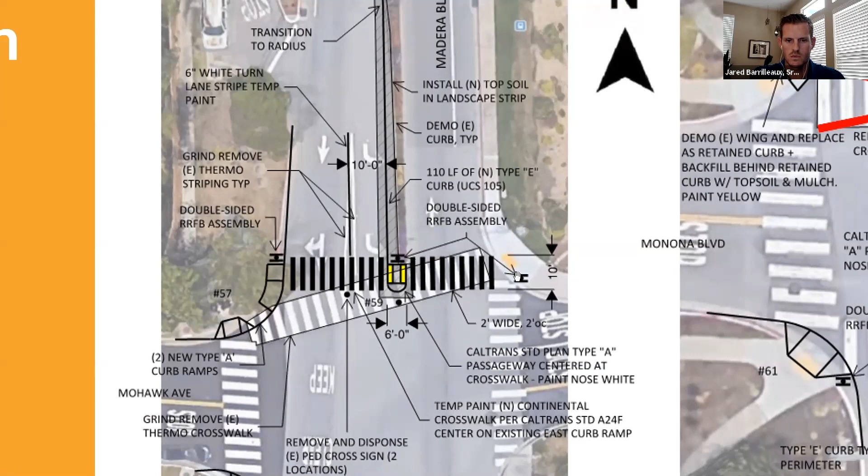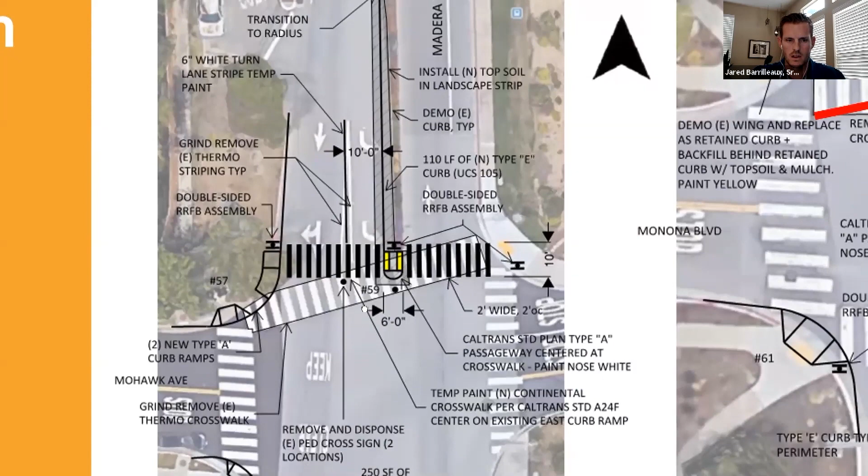Yes, I can do that, and your cursor should be able to guide people as well. So right here, this crosswalk - we recreated a more aligned curb ramp right here. We pulled the face of curb out a little bit to slow that right-hand movement of a vehicle around this corner, and also make a pedestrian a little bit more visible. We added rapid flashing beacons here across this crosswalk as well, so much safer ped crossing environment, and the alignment should really help out with that. Then on the south, this is the end crossing nearest the gas station on the corner of Tamalpais.

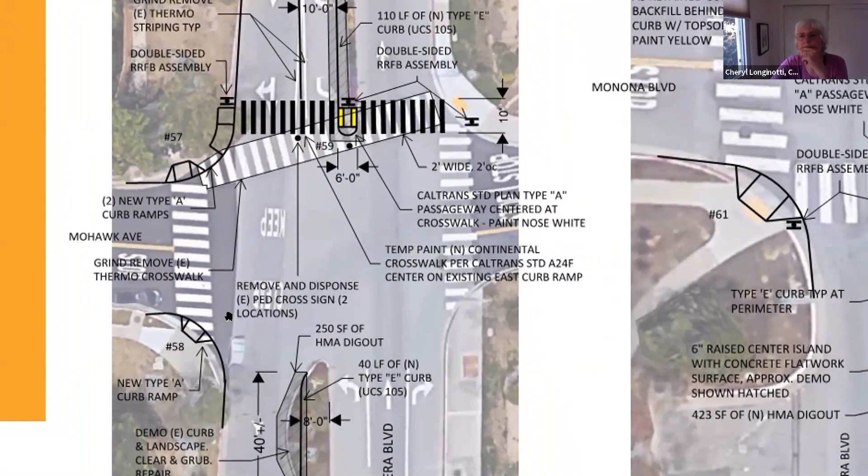And then on the south end of that intersection, we did a similar kind of treatment on this corner with a little bit more of a sharper corner to slow the car turning, and also bring the pedestrian out for visibility, reducing the crossing distance here.

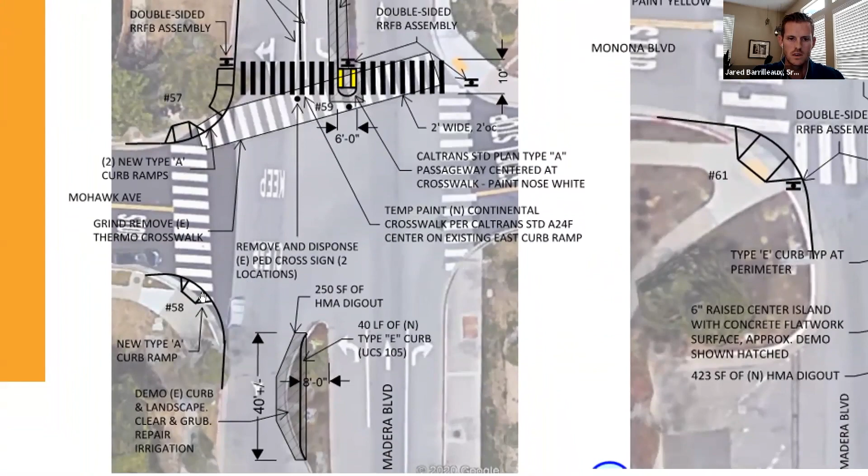Also part of this enhancement was that originally this median at the south side of this intersection bulged out quite a bit, and it created a pretty narrow passage for vehicles.

What's not shown here are the several options for a vehicle going southbound approaching Tamalpais. What was happening was if 3 or 4 extra cars piled up in the through lane, someone coming southbound on Madera wanting to make a right in this wide open turn pocket couldn't do so, because there's not enough width, and it just clogged it up.

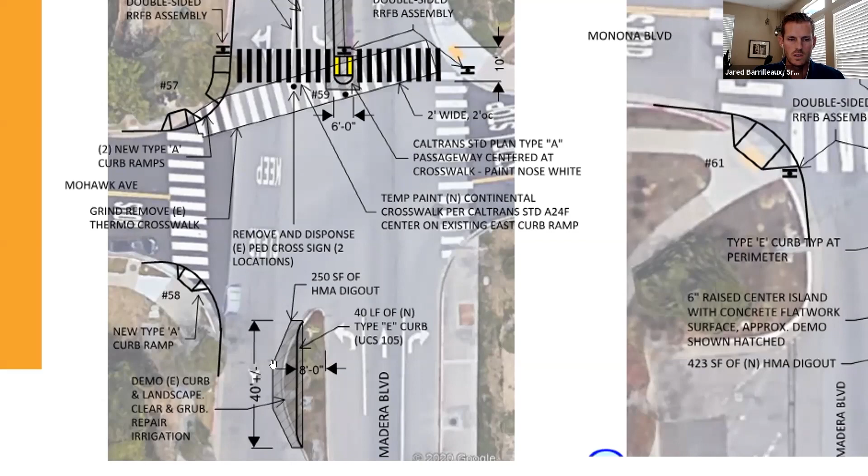So now this slight narrowing of the median has allowed this to fit a couple cars coming through, and it also doesn't neck down for cyclists coming through - it gives them a little bit more room. So that's a brief touch on some of the improvements here at this Mohawk intersection.

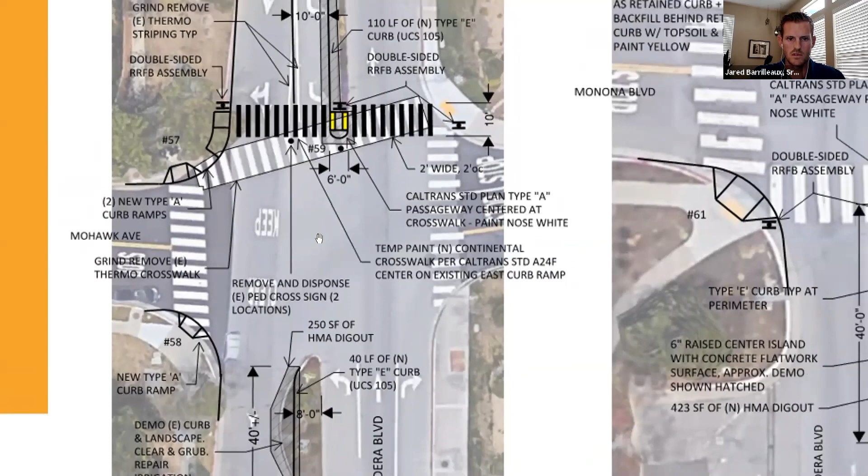Before I jump on, RJ, was there any other items you wanted to touch on for that intersection?

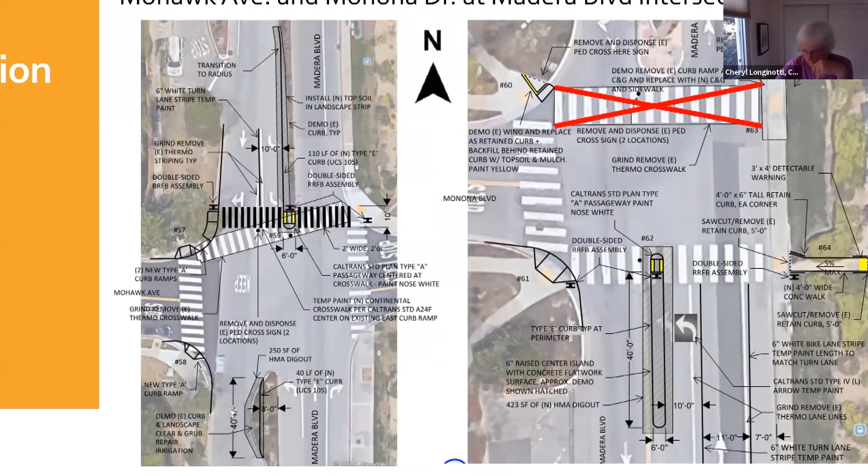Just a procedural note, and I'd defer to Bob ultimately, but I'd suggest we go through any comments from the committee and clarifications, then go through all of the items - I think we have about 6 items - and then open it up to the public at the end, and if we need to backtrack on slides, we can do that then.

I think I'm okay with that. First off, can we just stop and see if there's any questions from the committee members on this particular item? Is that okay, RJ? Yes, that's exactly what I was suggesting - we go through the committee, then after the 6 sub-items we can open up to the public, and if we need to revisit these, we can.

Okay, so are there any BPAC member questions? No comments, just questions on this item so far.

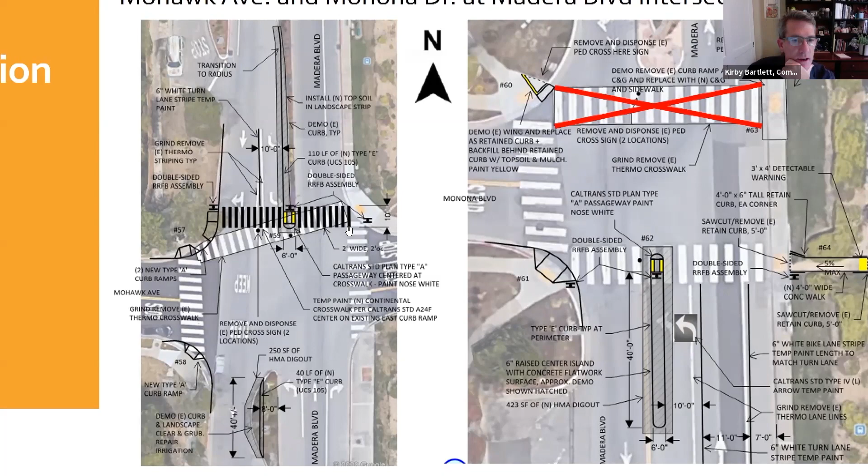This is Kirby, I have a question. Go ahead. The intersection or the crosswalk where you expanded the area to 6 feet, it looks like - is there still going to be a left-hand turn lane, or it looks like the grind removed the original striping - is that going to remove a left-hand turn lane? Is that correct?

No, the left-hand turn lane will remain. Right now it has a little split between the through-right and the left, so that split will be removed - it's just a single stripe. It still remains a 10-foot wide left-hand turn lane. Yeah, there was excess width that we were able to capture.

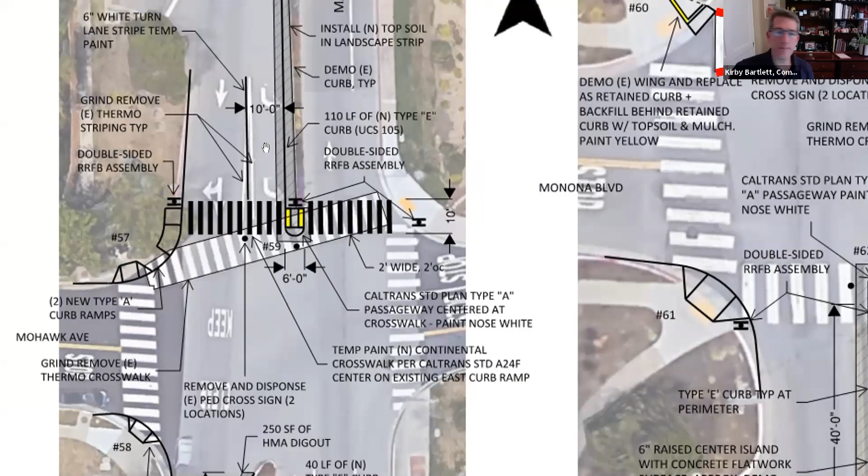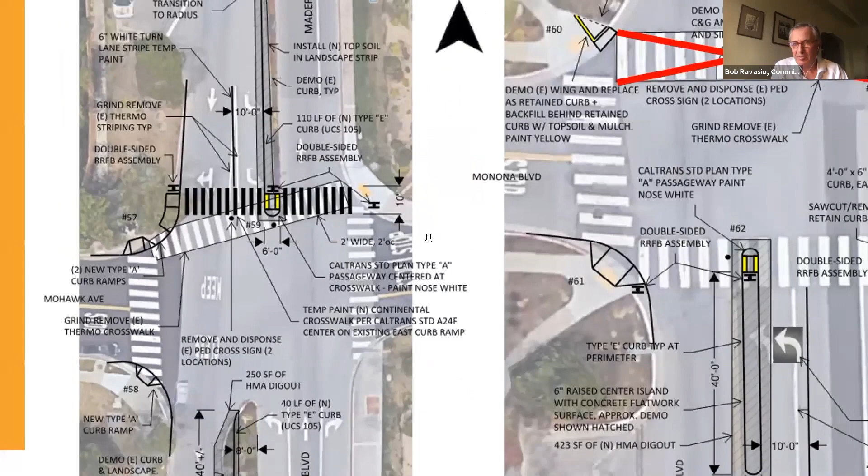Okay, thank you. Any other questions from committee members? Okay, thank you. Then RJ and Jared, I guess you can move on to the next one. All right.

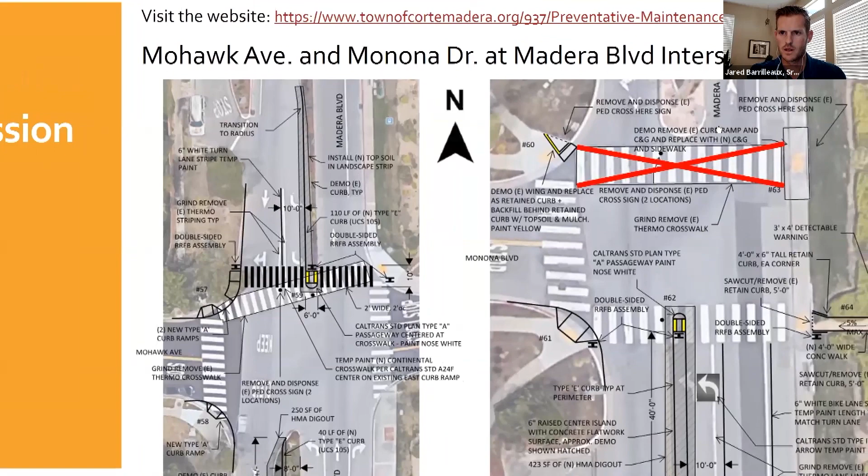So the next intersection is north from the previous one, up at Monona. Here you can see this originally had 2 east-west crossings across the road and 1 north-south crossing across Monona. There's a dirt passage here to the Safeway parking lot originally - so that was the original crossing environment.

What we've done is eliminate the northern crossing, which was not well aligned with how pedestrians wanted to make their way to the shopping center. The natural pathway was here, and we thought the redundancy in crosswalks was unnecessary. The southern crossing we felt was actually safer and provided better sight distance. So based on that, we eliminated the northern one and improved the southern one.

Some of the improvements include the Ped Refuge Island here, the RRFBs here, and the bulb-out corner type A curb ramp, reducing the crossing distance.

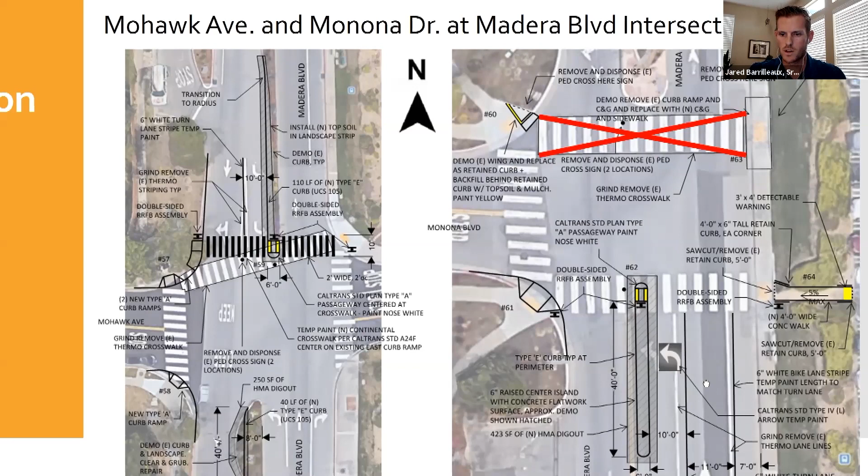In a similar fashion as over by Mohawk, the striping was slightly modified to allow for the median here, but there's still a left-hand turn lane and a through lane. Of note is the 7-foot bike lane, which will have a 2-foot buffer for a Class 2 northbound bike lane after our next microsurfacing project is implemented.

As of now, the result of this project is more of a temporary condition, in which the striping presented here will be applied. This portion of Madera is listed on the town's bike master plan as a Class 2, and there was enough width for us to do buffered Class 2s, so we thought that was a benefit.

But it's not installed yet, so we'd welcome any comments if there's any downside you can think of. We thought it was a benefit, so that's what we've proposed in our construction documents, and we would plan to do that if you all are in agreement.

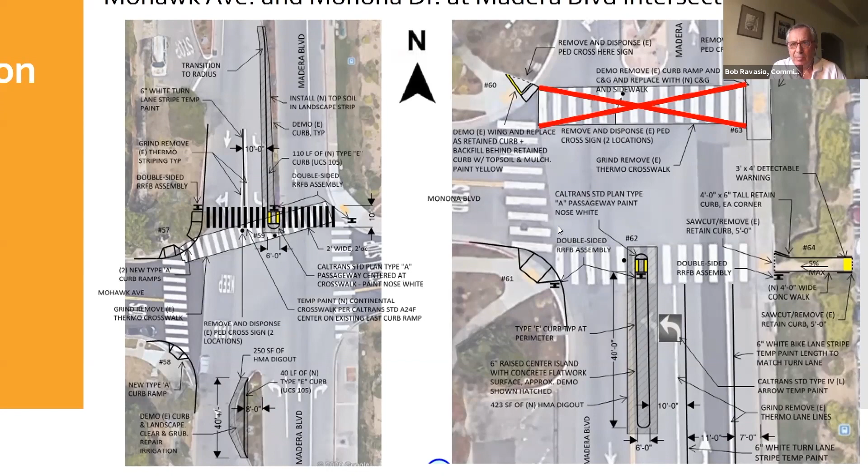I'd like to talk about that one a little bit, just to understand it better. Sure.

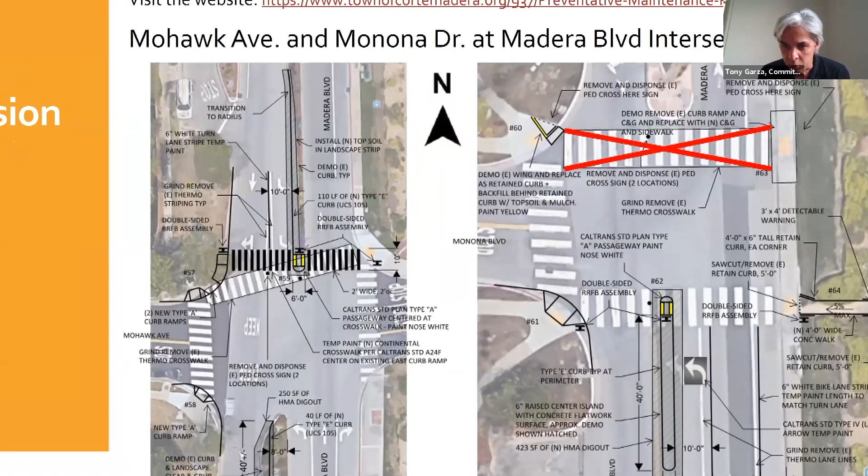So it looks like right where your cursor is, pedestrians would be encouraged to take that path toward the supermarket. You create a situation where you don't have a ramp at less than 5%, or it's 5%, but then you get dumped right into the parking lot. Is there going to be a path of travel that extends all the way to the front of the store? Yeah, I forgot to mention that little dirt path is getting grading and concrete work to make it an actual concrete pathway connecting to the parking lot.

At the parking lot, those stalls are going to be restriped. The first four stalls, where the pathway intersects between two parking stalls, that intersection will be widened for a 4-foot hatched zone. The two adjacent stalls on each side will be made compact and narrowed a little bit, so there will be no loss in parking count for the shopping center. That pathway will connect to an accessible, hatched, no-parking spot.

This comment came up, I don't recall if it was at BPAC or through emails, as something we should improve. We reached out to the shopping center and they were willing to coordinate and allowed us to do this work. Given the width of the parking stalls, we were able to massage them a little to get that 4-foot pedestrian aisle and still not lose any parking spots. We thought it was a great improvement, definitely a benefit for anyone needing the hardscape and compliant path of travel.

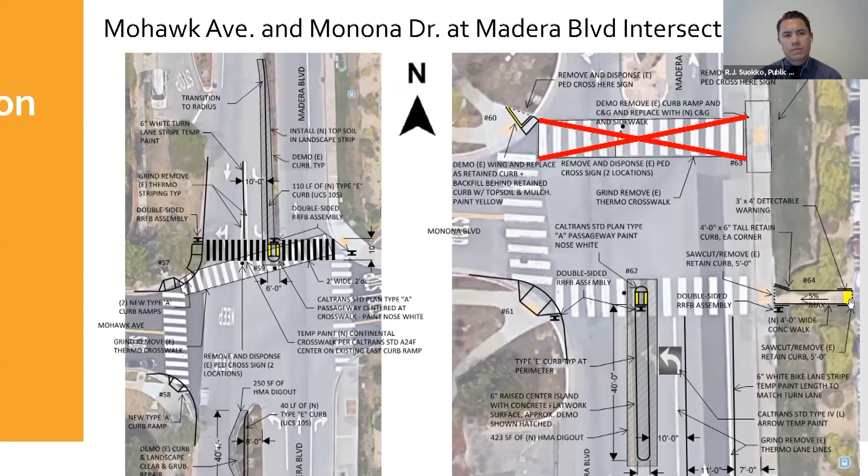I think that's a fair comment. We can look at, so you can see in the photo a truncated dome, the yellow pad there that typically signifies you're entering an area with vehicles. I think we can consider some additional striping or something that would suggest that at the end of that aisle they're entering a vehicle lane and a parking lot. So we can look into what options we might have there.

But we did kind of, and maybe it was flawed or not, but we just thought this was the right thing to do from an accessibility standpoint. It's being used now by able-bodied people, and we thought we should make it an equivalent facility for those that aren't able-bodied.

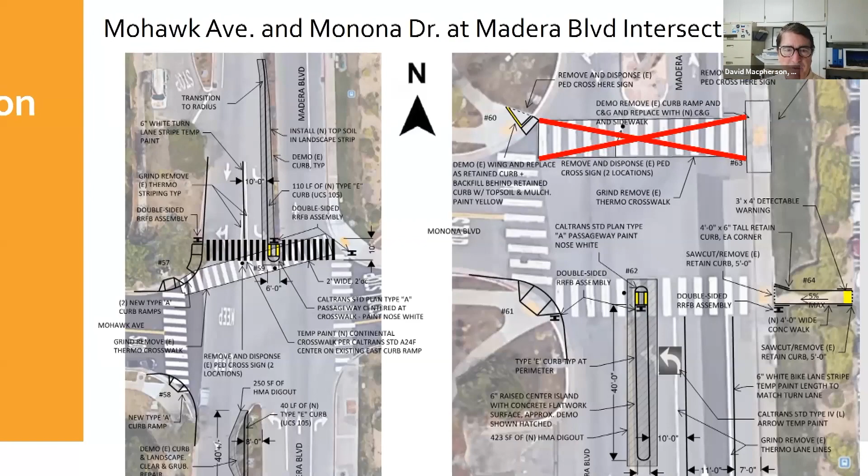Are there any other questions from BPAC committee members? I was just curious if the shopping center participated financially or will contribute.

No, they haven't given, nor have we requested them to. Again, this was born out of just, it seemed like the right thing to do from an ADA perspective. I don't know that it's going to increase foot traffic, but we just thought to make it accessible to everyone, able-bodied or not.

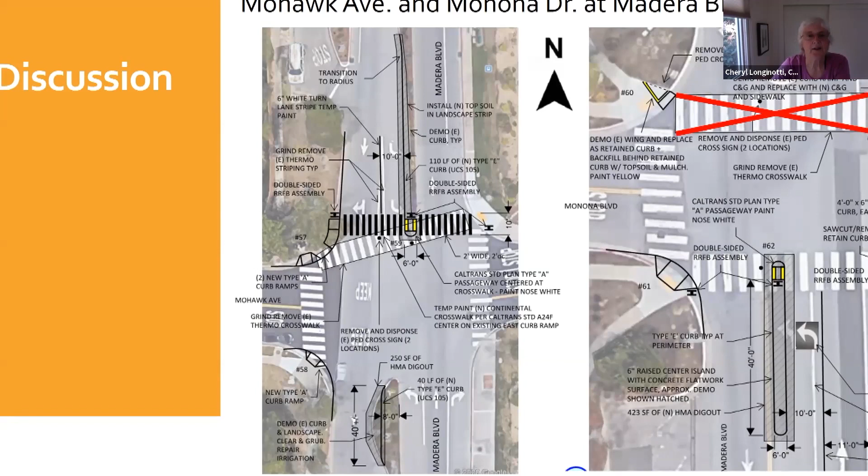I like the idea on the Monona intersection, as Cindy said, having buffered lanes is likely to encourage biking. I would just, I don't know how it works to allow the left turn, because people will be making left turns on their bikes from Madera onto Monona. So we'll look at that design when it comes up, but I'm glad that's in the works, or at least you're considering it.

Okay, thank you. And to clarify that, yes, we are proposing buffered Class 2 lanes.

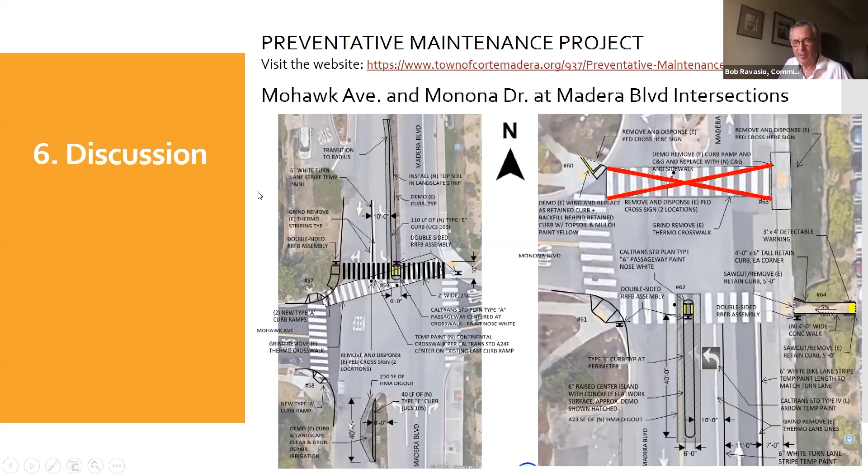All right, so here, still talking about Madera.

What we wanted to float out to BPAC was the idea of putting the green-backed bike legends along the Class 2 in both directions along Madera Boulevard, after we come and microsurface the road, which is to be constructed in September, pending bid opening tomorrow. One thing we wanted feedback on is the location of those green-back legends, if that's something the BPAC is interested in.

So what I've dropped in here is the extent of Madera. The north end is over here at Council Crest and Tamalpais, and then the south end here by Tamalpais. One thing to note is we have these two side streets along Madera Boulevard that come in and go out, and I've tried to show those locations to help define where the bike legend would go.

What we're proposing in the southbound direction is a bike legend just after the entrance to that side street, and then just before the exit of that side street, and then picking back up the same treatment for this side.

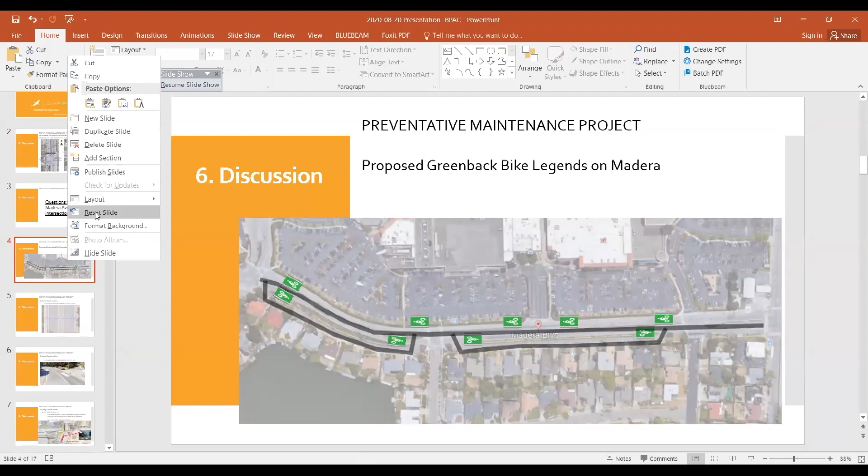While you were talking, something that happened to me many years ago entered my brain. I was riding my bicycle toward Tamalpais, but I had just left Madera by Council Crest. And between Council Crest and Monona, there's a curvature in the road that is fairly sharp. A large truck came along behind me and could not make that turn, and I almost got hit by the back of this large truck. I wonder whether anybody has thought of that or taken a look at it. I could prepare a drawing or sketch and send it to you. I may still have my old sketch somewhere in my files.

So Bob, was that turning onto Monona? Turning onto Monona? I didn't hear you.

Southbound on Madera, turning onto Monona? No, between Council Crest and Monona, about 2/3 of the way. Let me put my pointer on it. Can you see it? It's right about here. Okay, move it a little bit north, just a tiny bit. There, right? No, back a little south. It's right in there.

And the way I saw it at the time, I thought that curve should be made a little less sharp. It should be made more gradual.

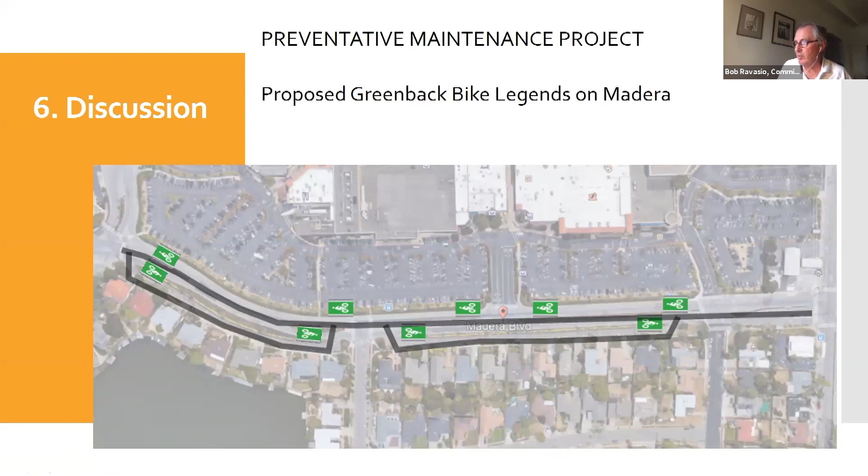Okay, then we will move off this discussion item and head on to the next one, which is striping opportunities. There are 3 different striping opportunities. Here's the first: San Clemente is going to be part of that microsurfacing project we were speaking of, and as a result we'll be laying back down striping there. The update is there's a 5-foot Class 2 bike lane on both sides.

I could jump in here. We had gotten a comment, I believe from Bjorn from MCBC, about trying to improve the bike infrastructure here. So we took a look at it because we were resurfacing or slurry sealing this section of roadway, and it's pretty constrained already. We do have one idea that we think will improve it, but as mentioned, it is constrained. The improvement is just putting a 6-inch stripe in lieu of the 4-inch one currently there, on the edge line between the travel lane and the bike facility.

There's not a lot of room, and if you guys have any reason not to do that, or suggestions otherwise, let us know. So, are there any questions? We're going to go through all 3.

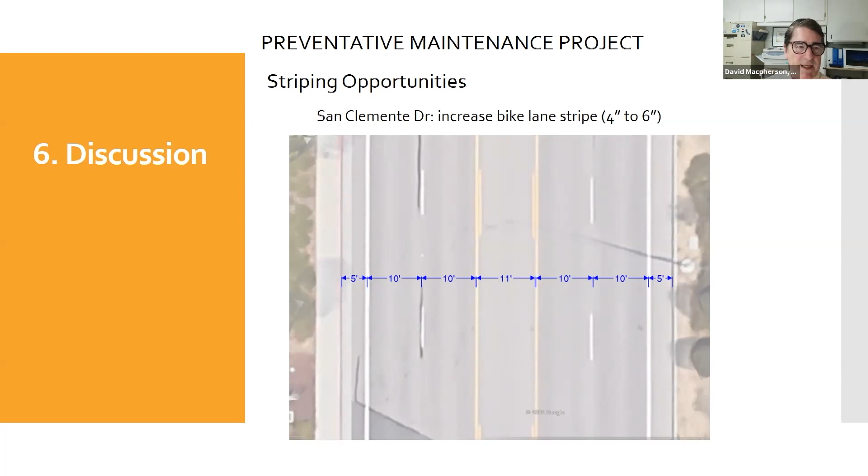And here's the problem that occurred. Coastland Engineering did a great job of cat tracking, putting the little white dots that would guide the thermoplastic striper. So obviously the center yellow line is not in the actual center of the road. It's pushed farther to the left on the uphill side. And Coastland put the cat tracks, but no one told the thermoplastic machine operator that the idea was to create an asymmetrical striping so that there would be greater passing distance for cyclists using the shoulder. And so the striper did not follow the cat tracks. So you've got it 10'6" in some places, and then it goes to 12 foot, 12'4". It widely varies because he eyeballed it instead of following the 10'6".

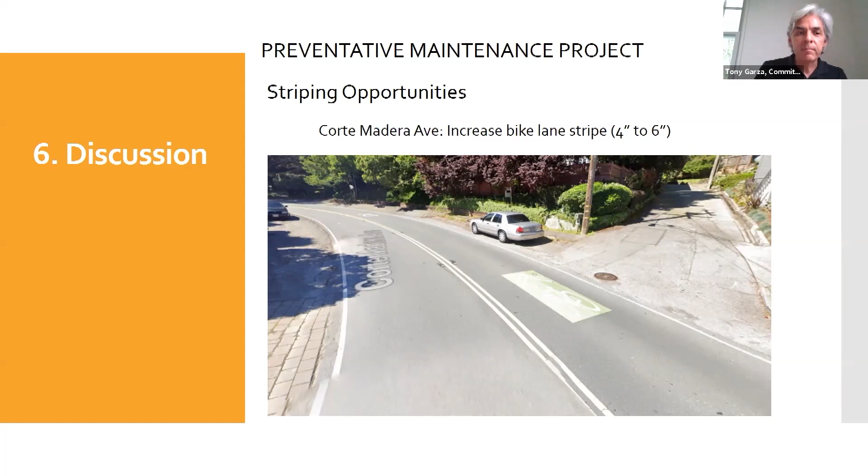Is someone else talking? Somebody needs to mute their microphone. If you're not talking, please mute your microphone. She said it takes one to know one.

Bob, I have a comment about Pixley. I'm not sure that the bot dots will do the job intended there. I'm wondering if we could put in the southern end of that red box a couple bollards, then put the bot dots, so that for people driving in a car they'll be less likely to cut the corner as we've described, and that still allows enough turning space for the fire trucks. I think if you could consider that - maybe just one or two bollards. I think it alerts the drivers.

If I may, I think when you say bollards, are you referring to the plastic delineators? Yeah, they can be anywhere from maybe 2.5 to 3.5 feet tall. So what I would suggest is we start with the bot dots, monitor and observe those to see if they're effective, and if you've been over on Almonte Boulevard near Highway 1 in Mill Valley, they've actually used delineators but cut them at maybe 6 to 12 inches above the pavement. If we need to, we can try that treatment to further create a visual buffer.

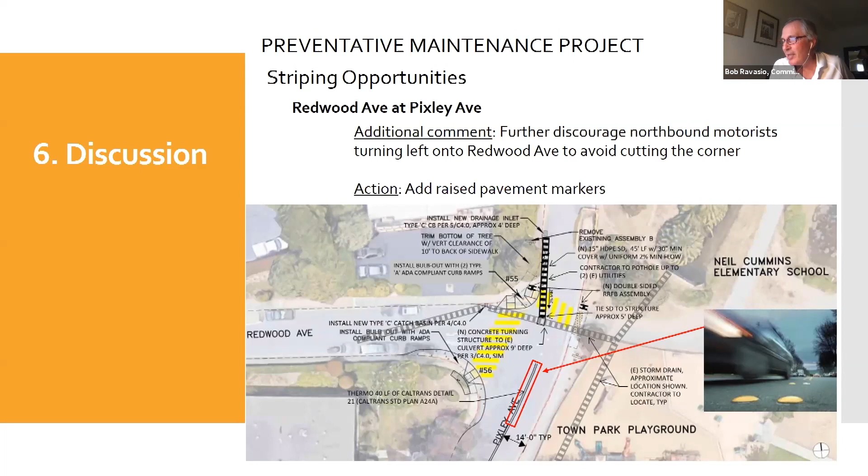All right, so you guys might recognize quite a bit of this presentation. It was an item at BPAC in February at our last meeting, but due to COVID, and we had actually slated this work for a new staff member that we have not yet acquired, this work hasn't been implemented yet. So we wanted to bring it back and refresh everybody's memories.

Yeah, if I could jump in - at the last meeting we talked about some of the strategies that San Rafael and other agencies are doing on the sidewalk program. We got great feedback from BPAC, and if I recall correctly, there was kind of advice to say, hey, go ahead and start doing the $50,000 in shaving and some other things.

We were prepared to do that, and then all of a sudden COVID happened, and for a moment in time threw our budgets up in the air. We weren't sure where our budget was for 3 to 5 months, and there's still some uncertainty there. So we thought it was prudent to pump the brakes and bring it back. I think we have a little more clarity now, and it's in a better spot.

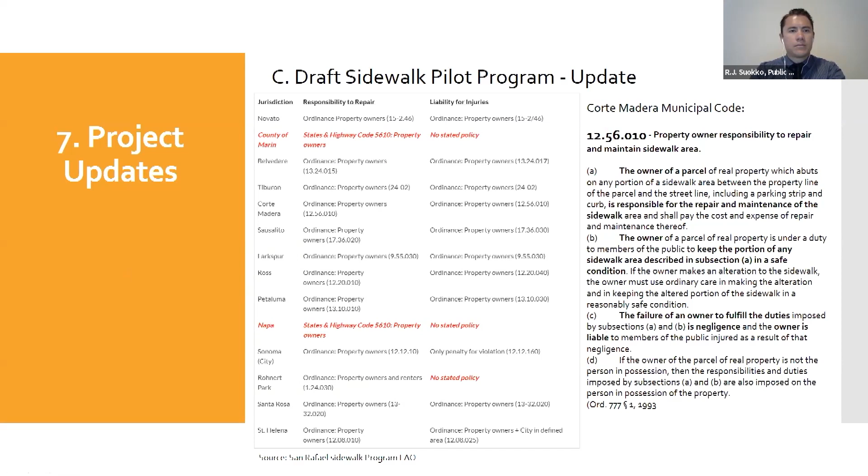This just shows briefly the different jurisdictions that have ordinance language for who is the owner of sidewalks. I won't go through the details here. This is a slide that's been presented at BPAC at least twice now. Essentially, it's saying that most agencies put the fronting property owner as the responsible party for maintaining the sidewalk. Next slide.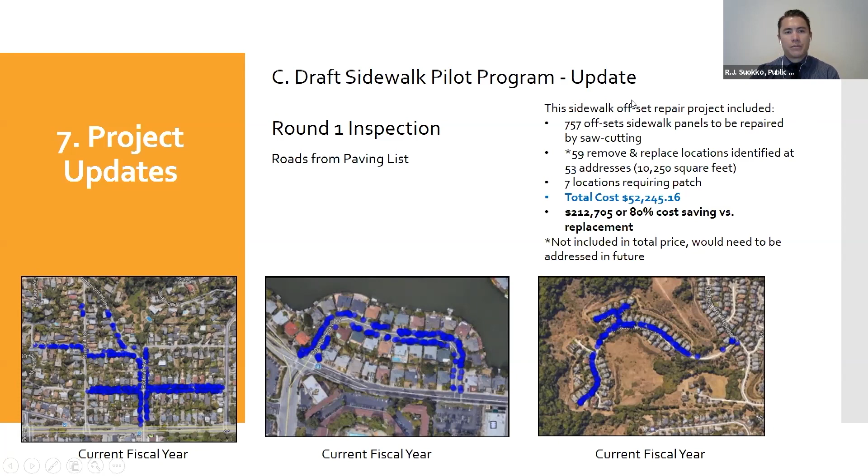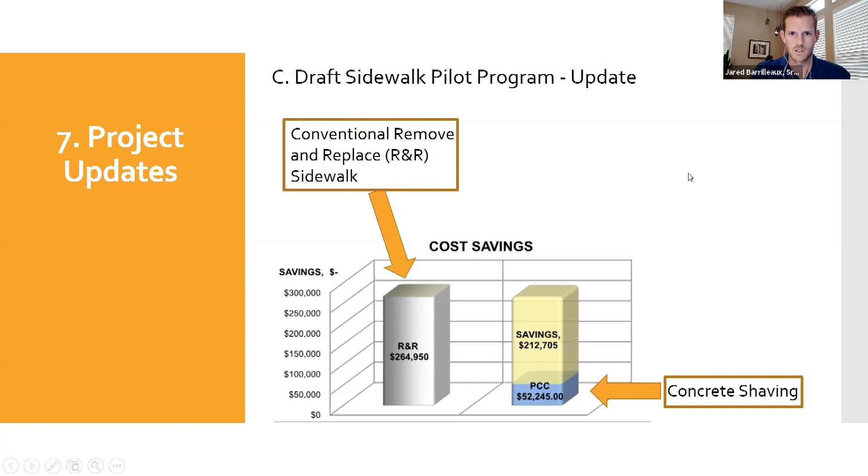So if I could take this one, Jared. Sure, so this is kind of where we're at, where we'd like to get your feedback. We see three strategies, and it's slightly different than San Rafael. I think they have a lot of application processes, so a lot of individual homeowners applying. That's something we might incorporate into the strategy number three here.

But also, we would do as part of number one, $50,000 of shaving that would be a town-led effort. We would formally have requests that the town fund sidewalk replacements as part of CIP projects as a one-time effort. And then lastly, number three would be, it could be two things. It could be your neighborhood that wants to get together and do a widespread project. We've had some feedback that possibly Mariner Cove and some other neighborhoods are interested in that. And so we would do a coordinated effort to do a large stretch there, and it also could incorporate that individual property owner who wants to apply for 50-50 matching funds.

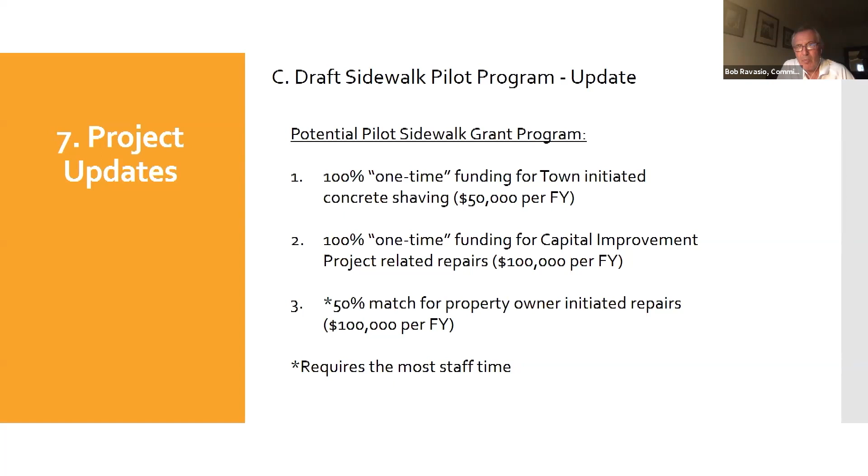Okay, I just wanted to add a clarification. So this draft proposal in front of you is using all three strategies, not perhaps picking one out of the three. And separately, we would be proposing it as a pilot program, so it would give us that flexibility year to year to make adjustments. So you're saying you'd go ahead with all three and spend $250,000? That is what we're proposing here. Wow.

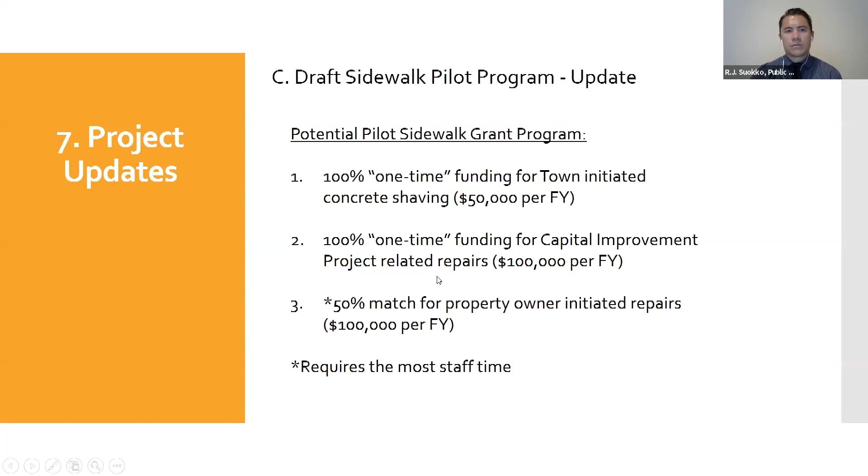Any further feedback from the council committee members?

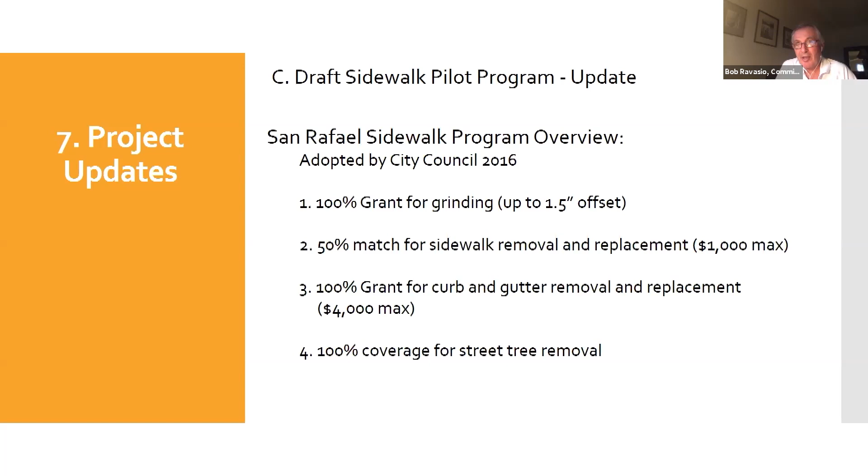If I can just say, I'll jump in. It's a great program, it is so needed, and I've had so many issues with this over the years. This would be fantastic, and I hope we can figure out a way. I don't know how we're going to find the budget to go ahead with it, but if we can at least get started on it, I think it solves a huge number of problems in town for people. So great work, thank you very much.

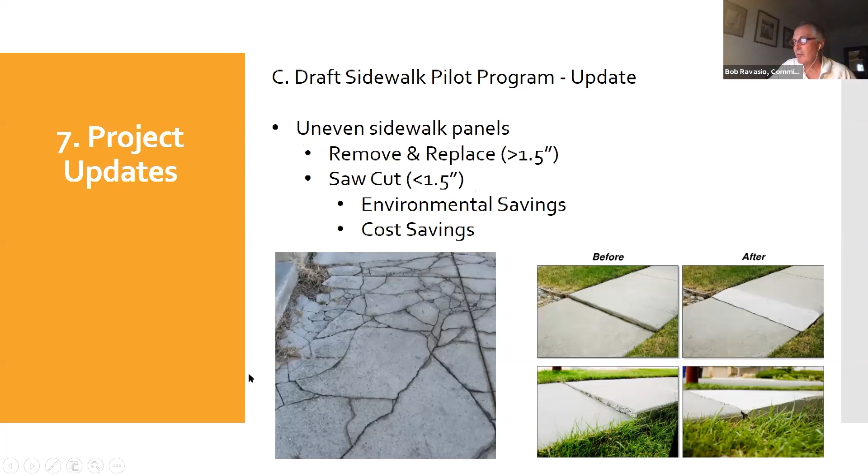Okay, then I think that wraps up 7C, sidewalk program update, and brings us to number 8, future agenda items.

Is there any committee members who have suggestions or input for future agenda items they think we should be dealing with? What I'd like to revisit next meeting, we had, when Nisha was still employed, considered a number of locations for signage, the new signage requiring a 3-foot passing distance for motor vehicles overtaking a bicycle. I don't know that the BPAC ever weighed in and decided on what the locations would be. I don't know how many signs were considered, or how many have actually gone up, if any. So I'd like to see that come back to the BPAC, and maybe Public Works can find Nisha's notes on the locations that were under consideration.

Okay, thank you, David. Anyone else want to consider future agenda items?

I just want to ask where it is as an agenda item. I thank you for working on San Clemente Drive and that striping and things, I ride my bike through there 5 or 6 times a week. To me, there's a missing link I hope is on someone's agenda. I've heard it discussed from time to time over the last 3 or so years I've been on the committee. Going from the east side of Corte Madera to the west side, the overpass on Tamalpais Drive, I ride over that with my son, and there's zero striping on the overpass. Something, at least temporary, needs to be done. I know for a while they didn't want to talk about it because there were bigger designs happening, but right now I think it's a big problem and potential for conflict because there's no striping for automobiles or bikes in either direction over the overpass. So I just wanted to know, is anything happening, can we talk about it next time, or what the plan is there?